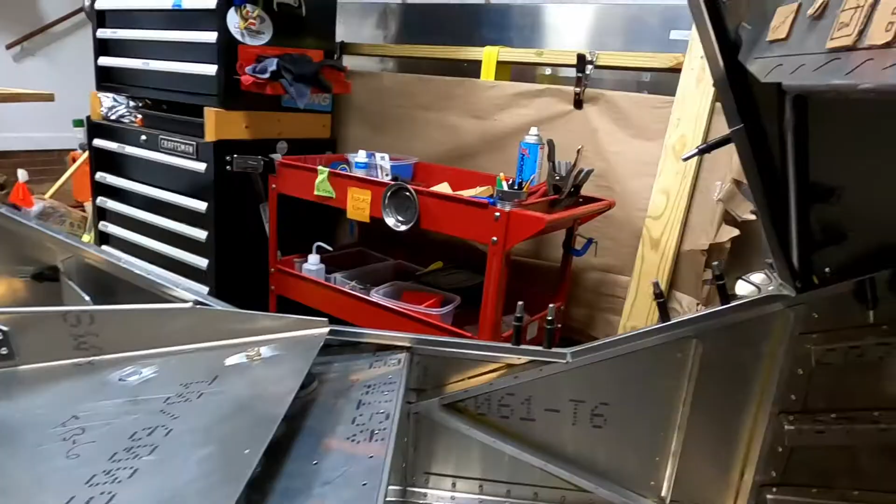Today we are taking a break from our chronological order of videos. I try to keep the videos in chronological order for my own sanity as well as yours, but in this case we're going to take a break because I want to get some information out for the sliding seats that I just installed that you see behind me. I filmed the whole thing of how to do it for the pilot side, and I already did the passenger side, so anything else you haven't seen before in another video, just pretend like it's not there. Let's get into the sliding seat install for the Zenith 750 Cruzer.

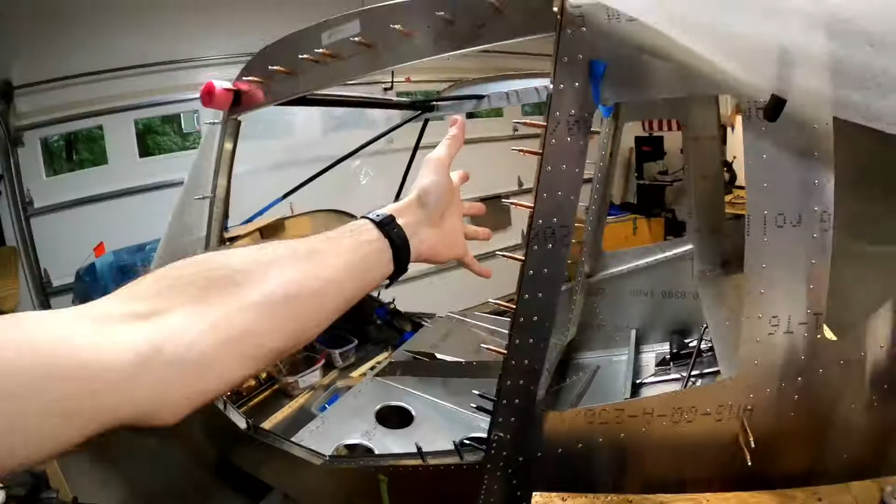I've already put this side in right here. As you can see, it's almost all the way in, but I haven't riveted yet just in case I need to take it apart to reference something. But the test fit seems to be working pretty well, and I think I did everything right. It was quite a pain, but now that I've already done this, the next one, which is the pilot seat we're just about to do, should go even faster.

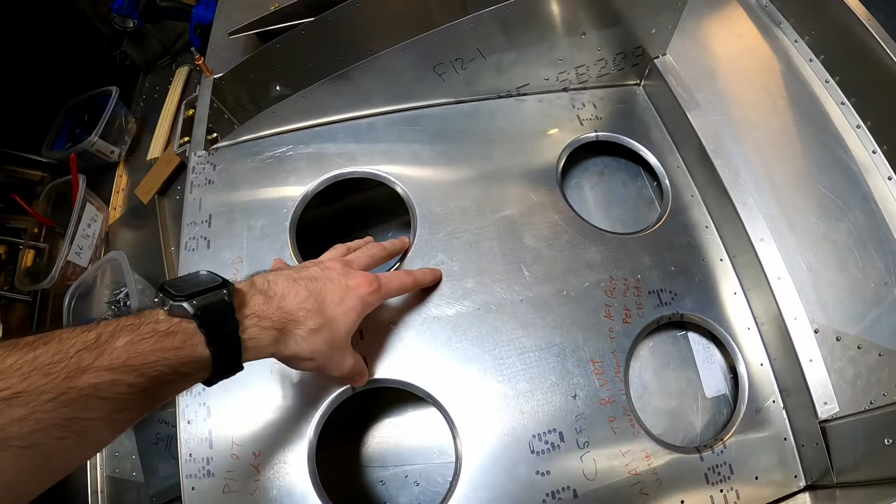So just to give you a look at that, well, it's not a very good look. Maybe I'll roll some clips in here, I don't know. But we're gonna go through building all of this anyway, so this is what it looks like. You have this handle that you can use to unlatch it and then roll it. I'm not crazy about the rollers, I think they kind of suck, it's hard to roll back and forth. That would be mostly my only gripe about it, but otherwise it works pretty well.

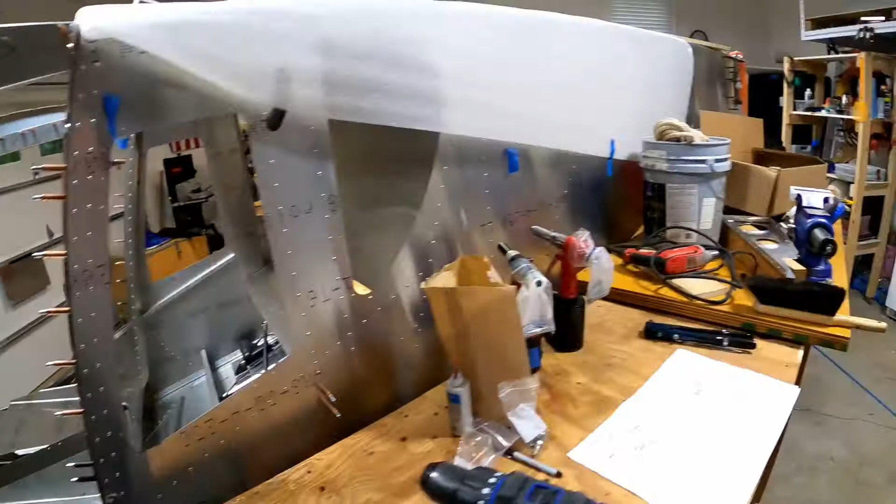So that's what we're going to do, and we're going to start doing it on this seat right here, just to give you a kind of reference before we get started. When you get this kit, it should have these plans. It has 2 pages of these drawings, kind of plans, and you'll notice one of them says STOL 750 and the other says Cruzer.

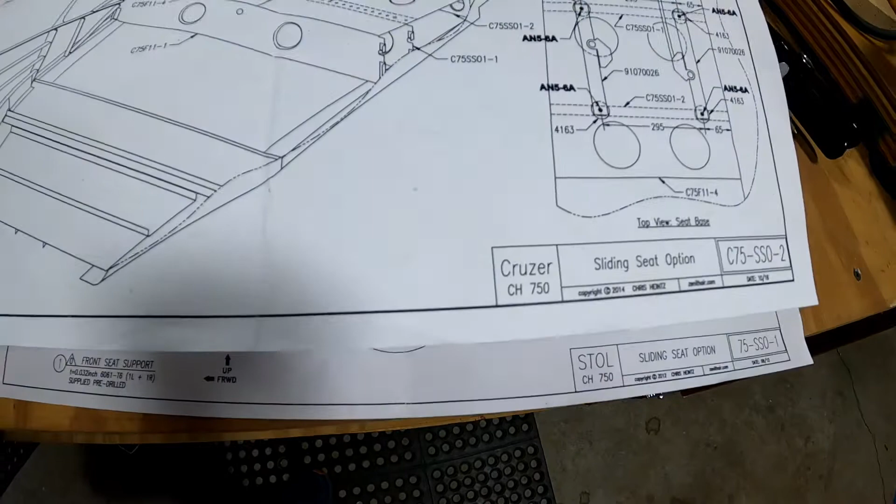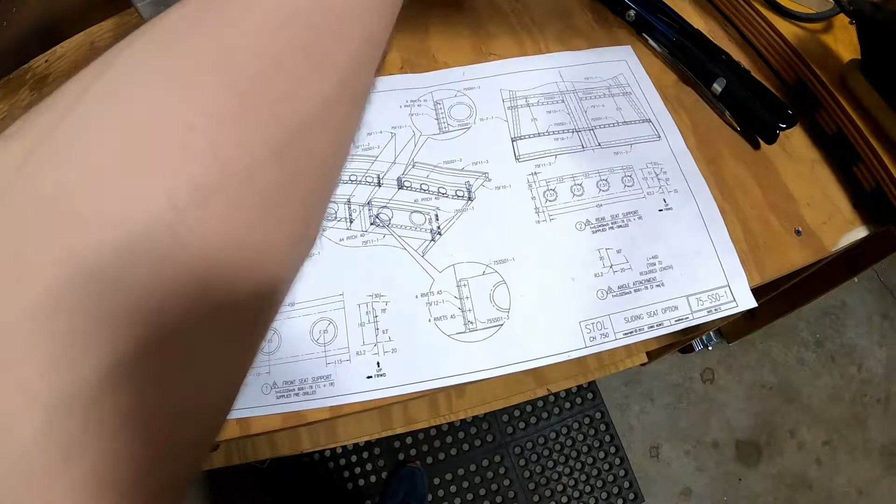At first I thought these were 2 different versions, you know, like if we have the Cruzer, I thought we didn't need the STOL version of the plans, but that appears to be incorrect, because you need all that information in order to make this work. So this is kind of your outside view drawing, showing some of the stuff, and then we have more detailed drawings and also how you would actually make these things, like the bend radius and the angle and stuff. Fortunately, we don't have to make anything, thank goodness, but we do have a kit.

Obviously half of the kit is already in there, but we have these pieces like this right here, and it's pre-drilled on one side and not on the other, but we'll get into that more as we go here. And then here's basically sort of the list of what I'm doing.

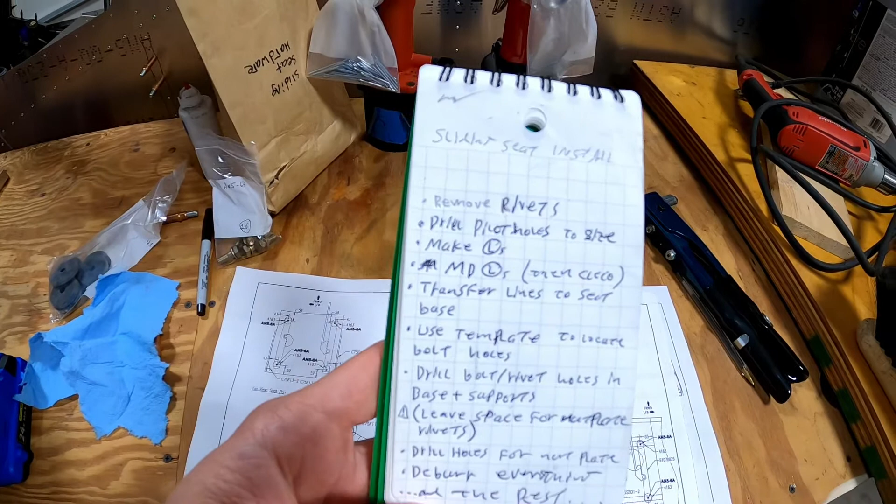First we're going to remove the rivets, because we have to take out a thing. We have to remove the old seat support. We're going to remove the rivets. We're going to drill the pilot holes to size. We're going to make L angles. We're going to match drill the L angles. We're going to transfer lines to the seat base.

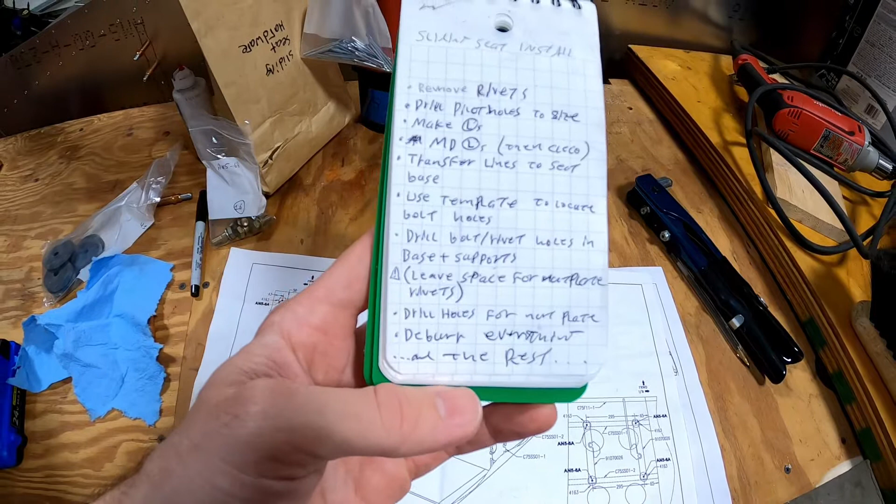I think that'll work. We're going to use a template that I made to locate the bolt holes, so we're kind of cheating, but hopefully that will make things a lot faster. And I do recommend probably just taking the time to make a template, because it will probably save you time.

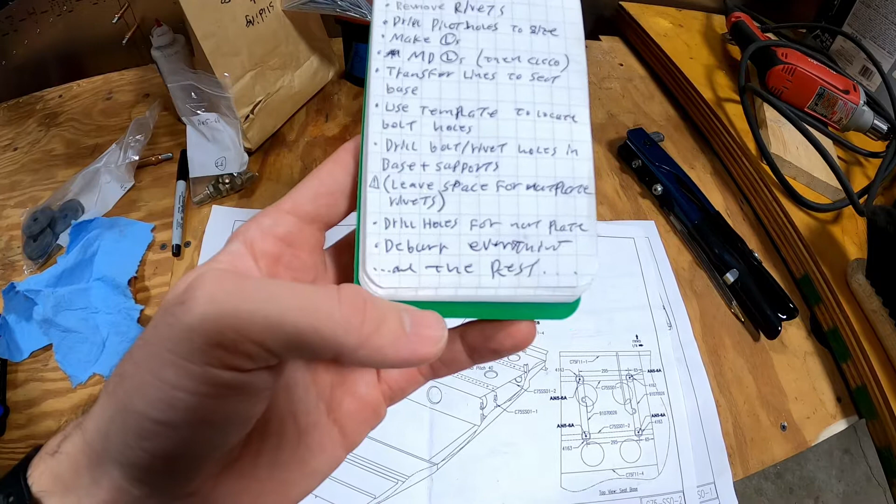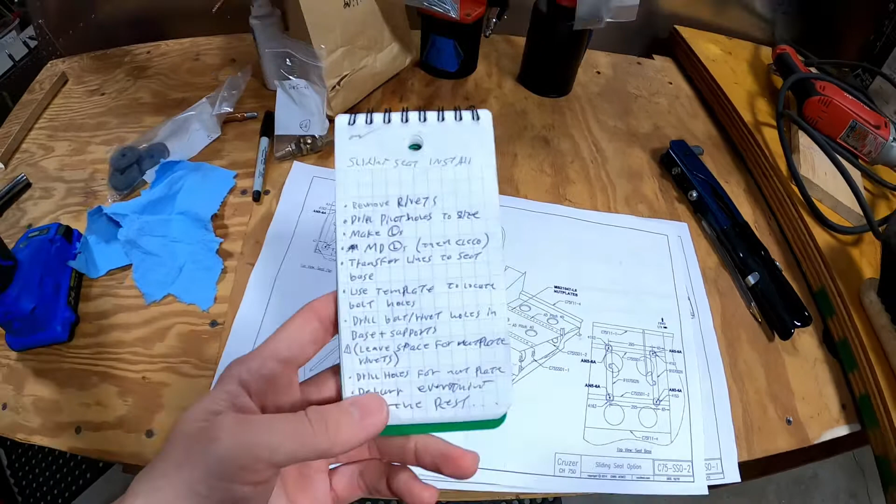Drill the bolt and rivet holes in the base, the seat base and support, basically drill through them. We need to leave space for the nut plates for the bolts, and we need to drill holes for the nut plates, rivet holes for the nut plates. And we need to deburr everything and a bunch of other stuff that I ran out of space for on this piece of paper. So it'll become clear once we're actually getting started on it, because it'll kind of just be obvious what the next thing is, or at least hopefully it'll be obvious.

Maybe that won't go like that at all, because maybe this will actually turn out to be still more difficult than I thought. I don't know.

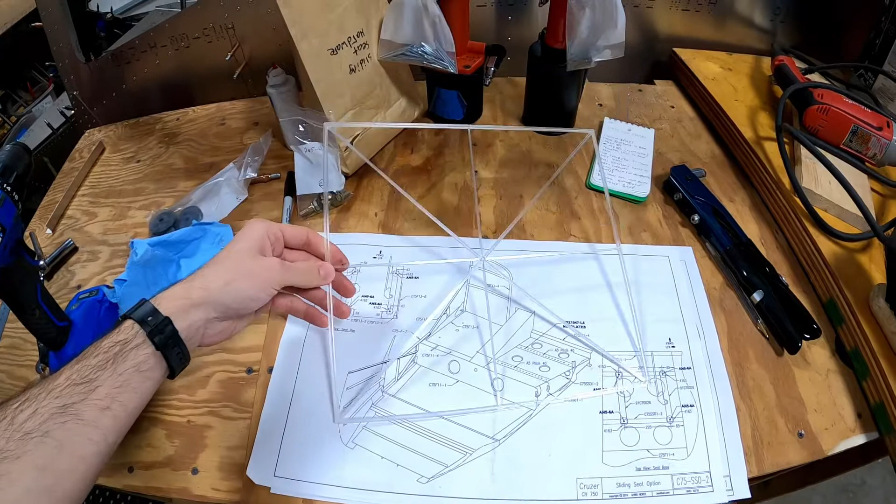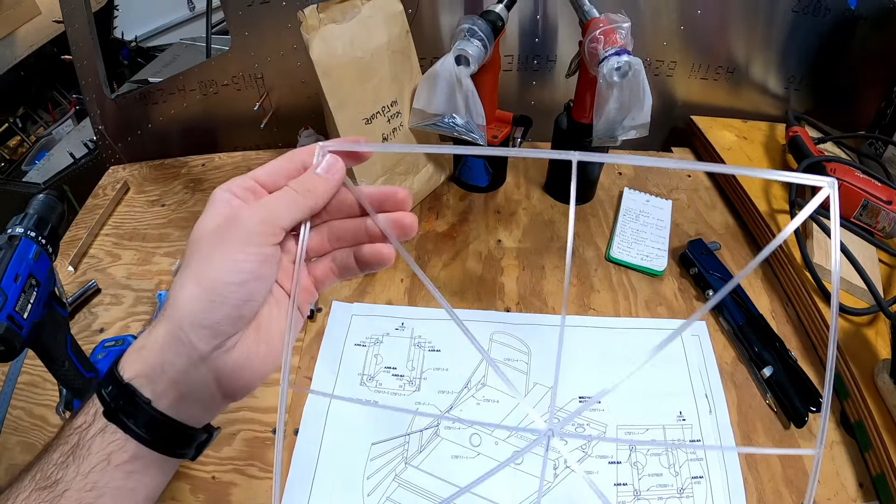Just for reference, this is a template I 3D printed on my CR10, which has a 300mm by 300mm print area, and this thing maxed it out at 295mm across and 280mm top to bottom. It's clear so it's kind of hard to see, but I haven't used this yet so we'll see if it works. The idea is at the very corners there's a little notch, and that should be where all the holes need to go for our seat tracks, which we're going to take a look at in a moment.

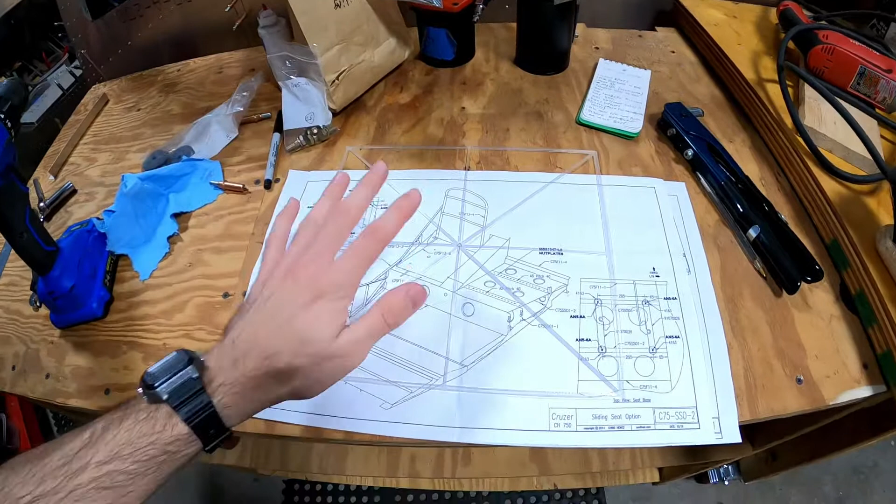So let's just get... ooh, that kind of came apart there. Well, that's okay, it still works good enough. Let's just get started on this, and we're going to start by drilling out the old rivets.

So the first thing we need to do is take out this seat pan, or no, seat base. This is the seat base right here. This is the seat pan, the thing the actual seat is made out of. Just so we're getting our terminology right here.

The first thing we need to do is remove this old seat support. So we're going to drill out the rivets right here, and then drill out the rivets on the front, right there, and then on the bottom as well.

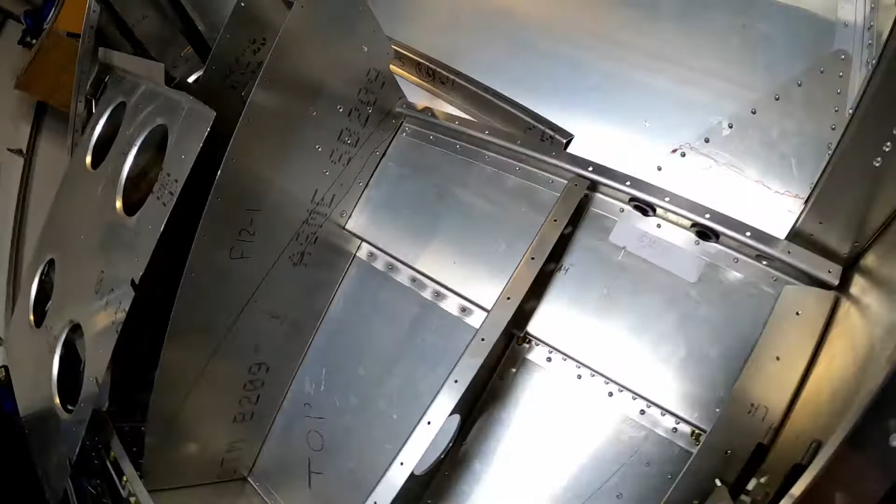We're not going to drill out these ones on this L angle, because the rivet heads are blocked by the landing gear, and I don't want to take off the landing gear just to get to those rivets. So we're just going to leave this L angle here in place. It's not going to hurt a thing, it'll just be sitting there until we want to remove it for some reason.

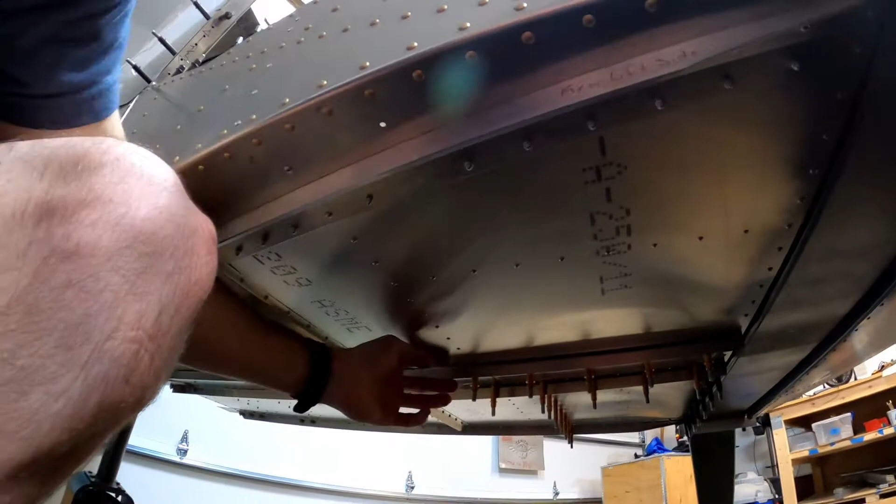We're going to remove the rivets along the lip, or flange, of the gear channel right here, so we're removing the rivets that are under this seat section. What I'll do is come under here and actually label them with a Sharpie to make sure I'm drilling out the right rivets.

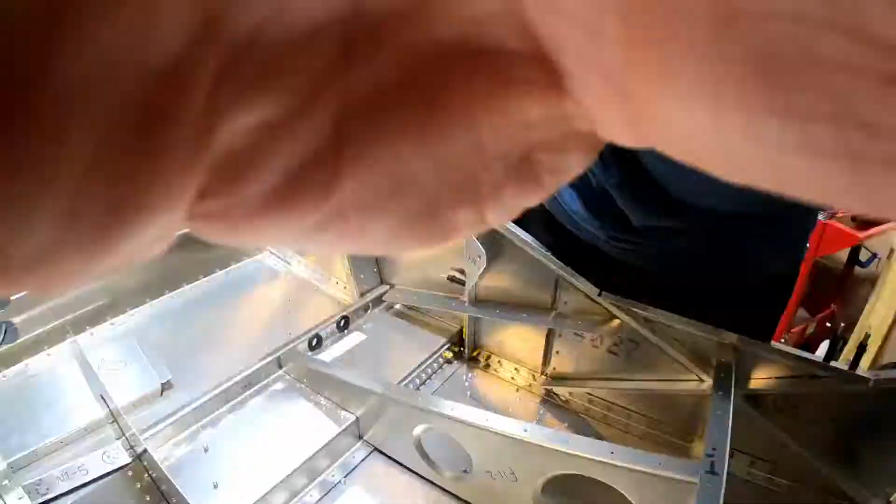Okay, so now we have pulled this seat support out, which is great. Now we need to start working with the new seat supports. And a couple things about this one: we're actually going to have to already deviate from the plan.

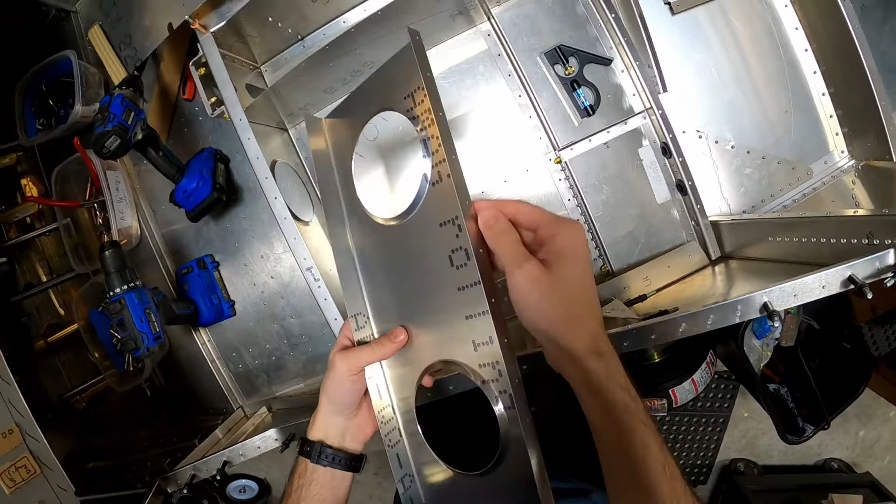We're not going to drill all these pilot holes out to size yet, because I forgot that on this forward seat support, this taller one, there are no holes. So we have to drill the holes out so that this will fit in here.

Now, speaking of fitting this in here, interestingly enough, there is one hole. Let's see, can you see that? I hope you can see that.

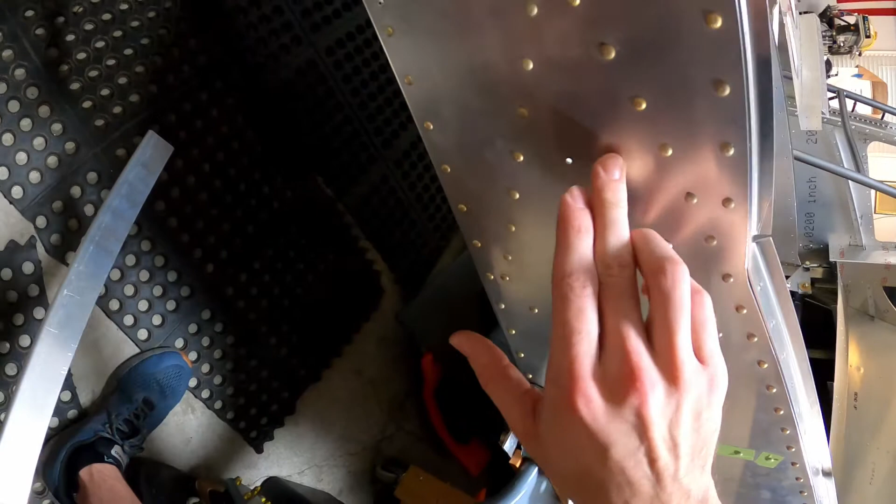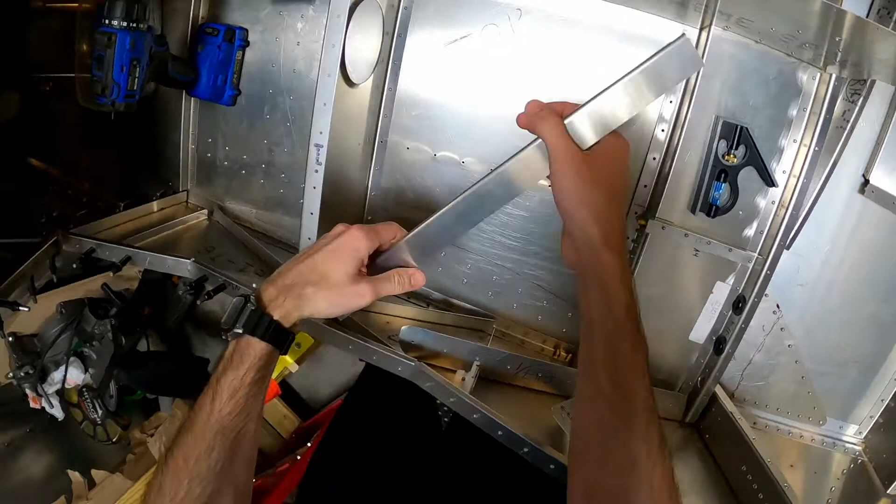There is one hole that was already drilled in this cabin side assembly, because the cabin side assembly was made at the Zenith factory, and so they put that together, and it comes all put together. But there are holes on the side, these open holes right there and there. So there's two of them on the side, and then there's one down there. That is actually pretty great, because that gives us a good locating hole, but it's only one locating hole, and it'll be right on the very edge, this edge hole right here.

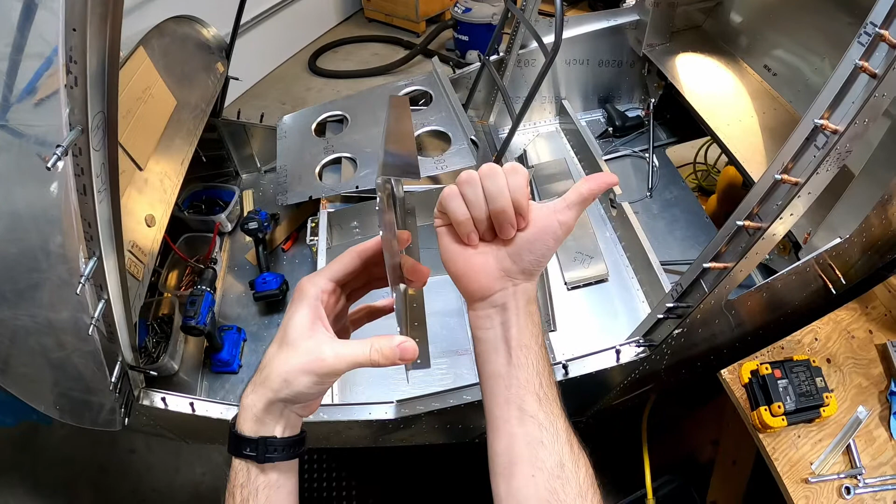By the way, if you're trying to tell the difference between the two sides, because you'll get sort of mirror copies of the seat supports for both seats, the way to tell is you want the flanges in the lightning holes to point backwards, pressed in and aft, and the top is going to be the side that has a fatter flange, and there will not be any holes on the top.

And then on the door side, the outboard side, you're going to have cutouts right here for the extrusions and whatnot. So in here, and these can be a little tricky to get in sometimes, but you want to get them like this. Yeah, so you can see there's cutouts there for the extrusions in the side of the cabin.

And pretty much the same deal for the aft seat support. It has this little lip, kind of this little extension here on the edge, which I think there's actually too many holes to even be able to reach and rivet. So we probably won't be using all of these, but it has those holes right there pre-drilled to come in here. And actually we'll probably have to trim this a little bit. I had to trim it on the other side, so we may have to trim this edge to fit in here, but it basically fits right along.

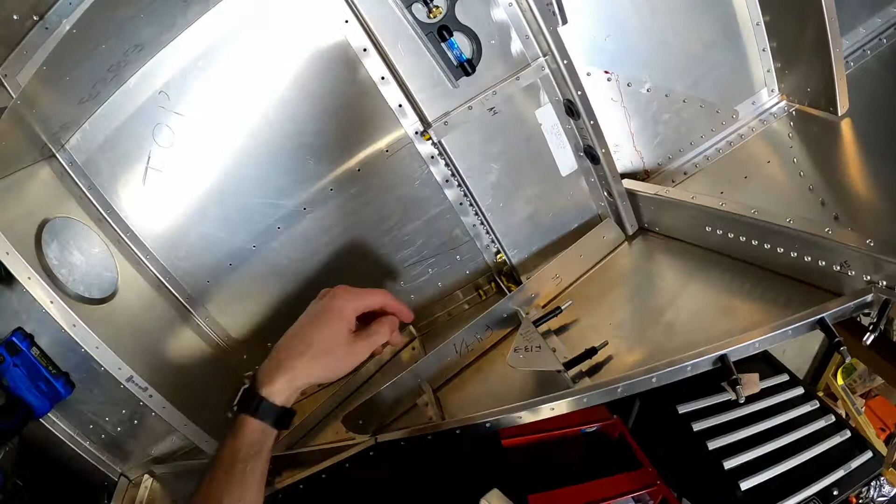Yeah, it's supposed to fit along the extrusion. I'm not sure, I can't remember if I just drilled the hole like this or if it was pre-drilled, but this hole for the bolt is just too close to the extrusion to allow this to slip in between it. So we'll have to trim this up.

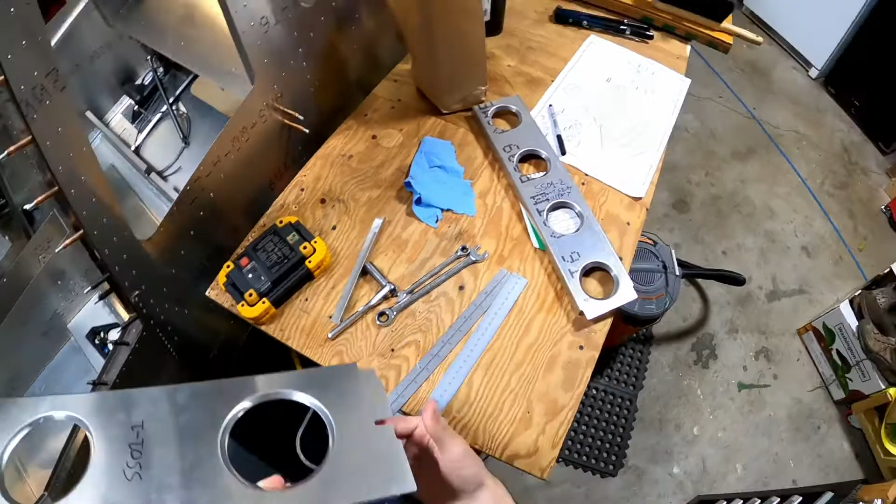But anyway, first let's deal with the forward seat support here. So what I'm going to do is actually drill this out to A4 size. So we'll go to A4 because that is the size of the hole that is already in the cabin.

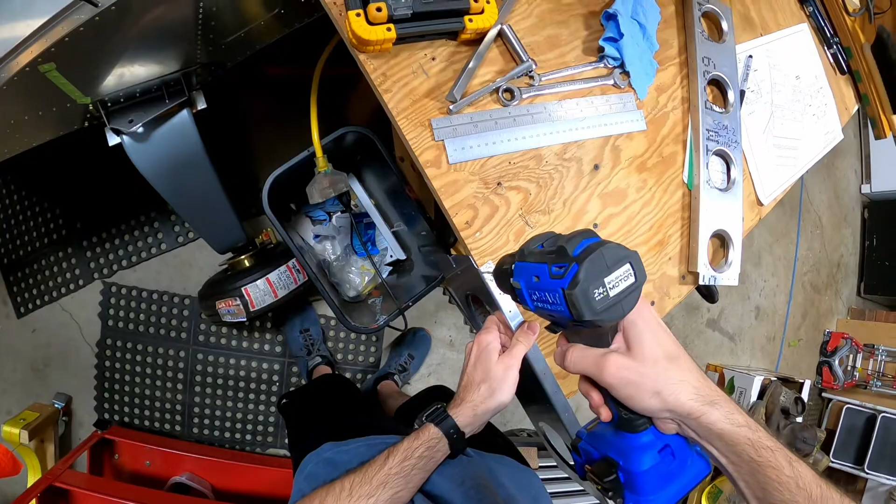We'll try and do it like this. So let's see, so cabin side. So we'll drill this to A4. And then we'll get our clecos and cleco this baby.

Okay, gotta put it kind of an angle there. There we go. All right, let's cleco this thing. And of course, in case I didn't say it already, there are many ways you can do this, different orders of things, but I'll just show you the way that I'm doing it here.

All right, so we're clecoed up on that one side, so we just want to straighten this up. Now, we can't just have it run to this hole, by the way, this hole that was already in here that was drilled for the old support, because it will not be straight. It won't be perpendicular to the rest of the seat area. So probably the easiest thing to do is just sort of square it up along here. It doesn't have to be perfect because we do have a decent amount of flange here, but we want it to be pretty close, obviously.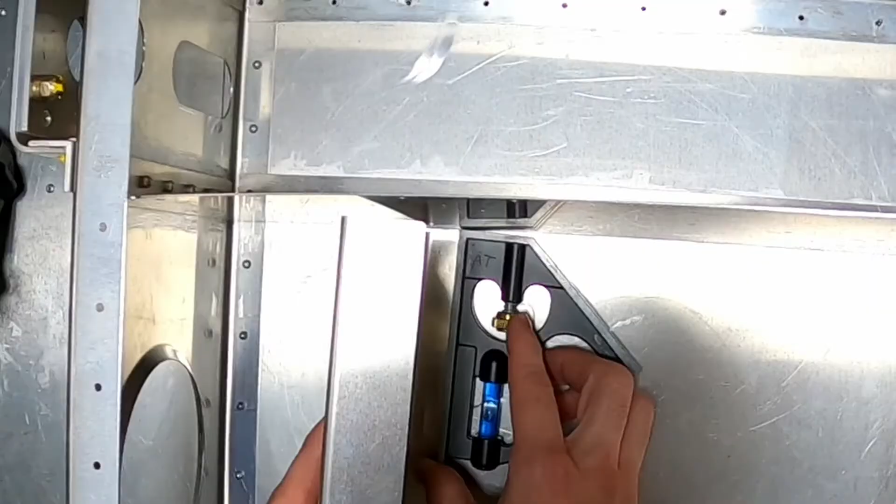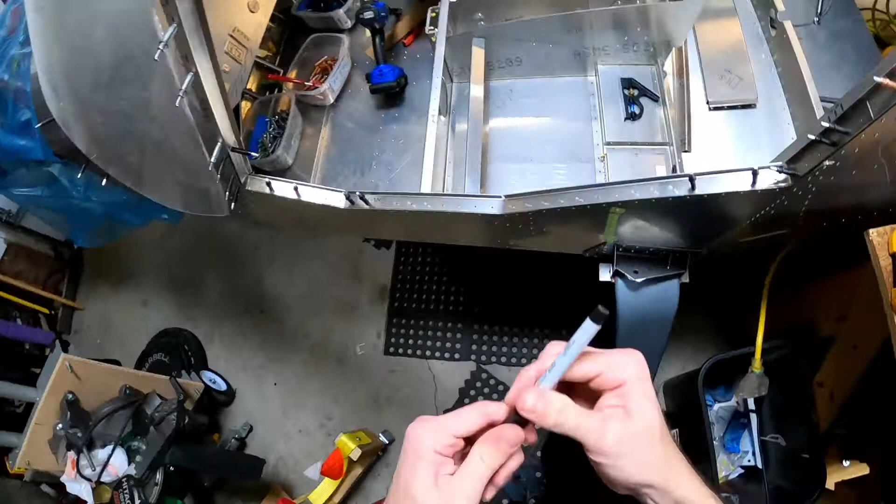So if we kind of bring it up here and figure out where it is squaring up, right there, that looks good right there. And then we can get our other Sharpie and we can just make a mark. We could just make one or two marks just to get an idea. Again, we're not going for spaceship precision. Yeah, and the other thing we could do, we could just make it easy. We could put a line along this flange. That might be nice for later. I can't really get a Sharpie down on the other side, so we'll do that.

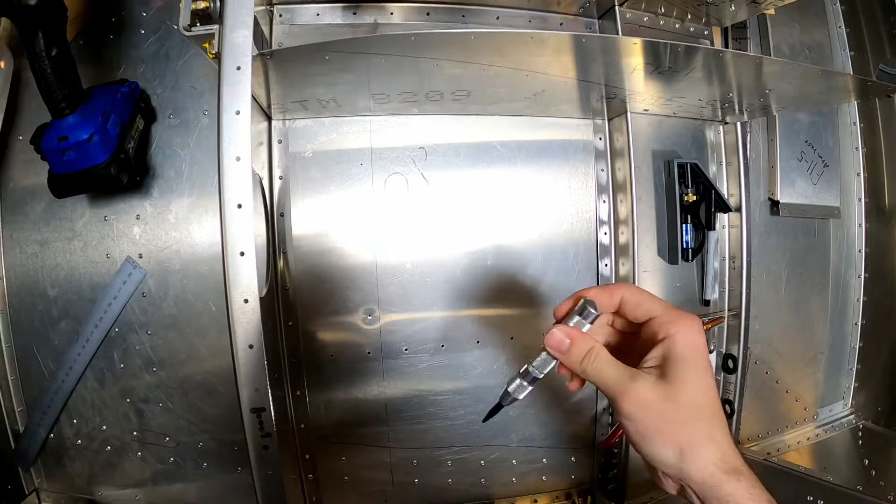Okay, first I'm going to drill a couple locating holes so that way I can actually match this stuff up. So I've got a block of wood underneath here to support the skin, and we're going to do a center punch to make it easier. Oh, that's a little too powerful. A little too powerful. Okay. I don't want to actually dent metal, or you know what I mean. There we go. Boom. Okay. Cool, so that's super groovy.

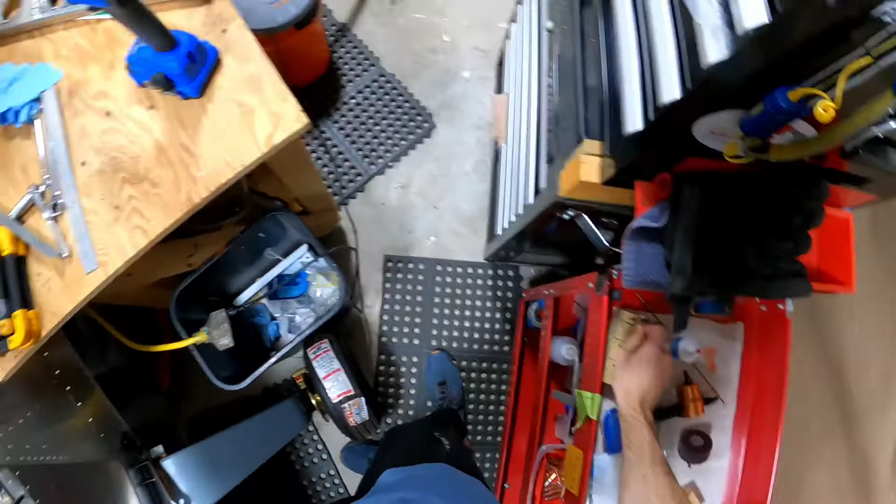Let's get our A3 sized bit. Get our A4 over here. I like to keep my bits nice and organized. Keeps me from reusing old bits and that sort of thing. Okay. And let's get this guy here. And we'll go ahead and drill a few holes.

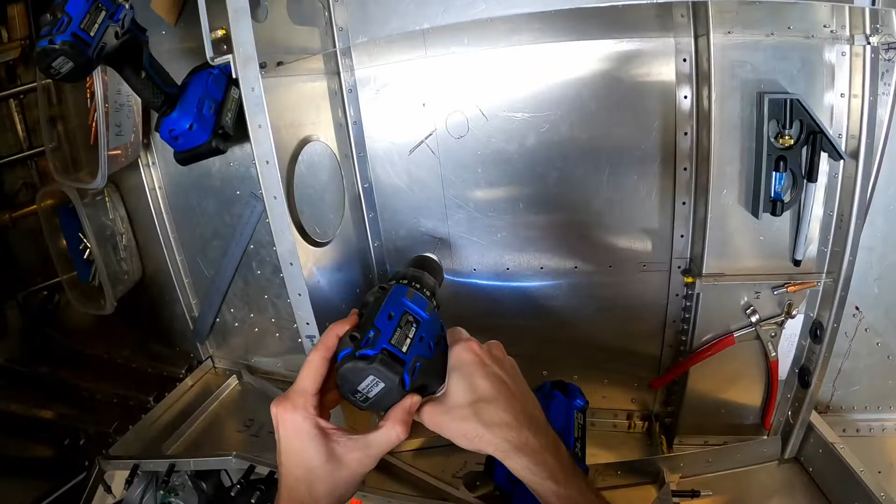I think this bit is just about done, actually. Oh yeah, that's a pretty crappy bit. Alright, you go in the trash can. We're gonna get a new bit because I don't have time for dull bits, I don't have time for unsharp bits.

Okay, now that I have those holes drilled, we can put this back in place, cleco this baby, and then drill the rest of the pilot holes, and then drill them up to size. A4 is what we will do.

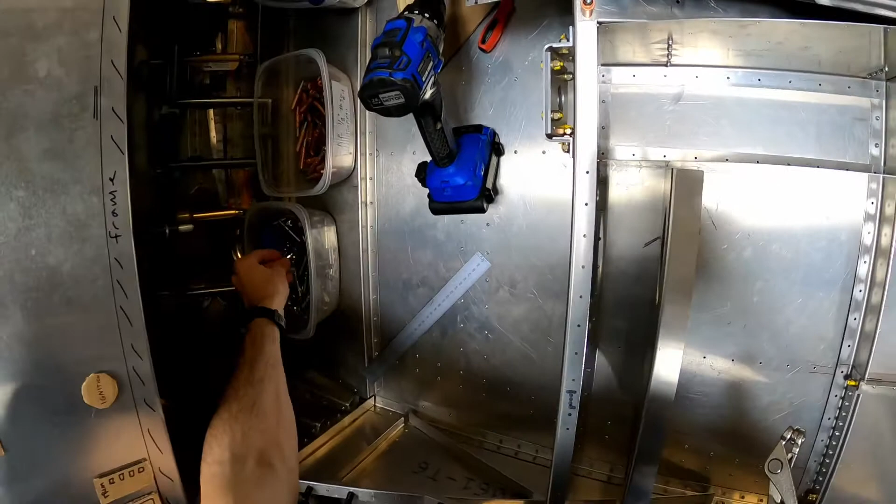So first we need an A4 cleco right here, or number 30, and we'll get our number 40 sized clecos. Cleco in there, like that. I think this will work out pretty good.

This was very confusing, much more confusing the first time. Now I think this looks pretty darn good. And of course there is some wiggle, some bendability to the parts. Now we need our number 30 bit here, our long number 30.

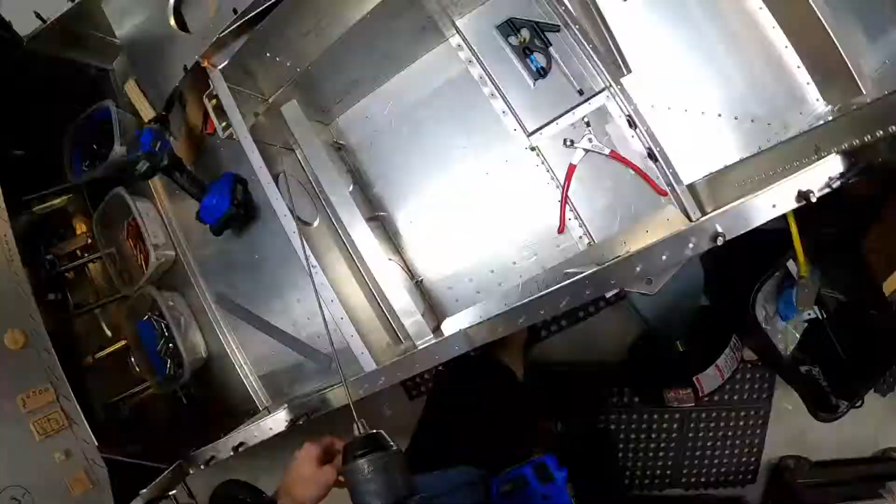Put a little bit of Boelube on there to start out, and we will just match drill all of these holes. And so we can go ahead and drill those out to A4, or yes, A4.

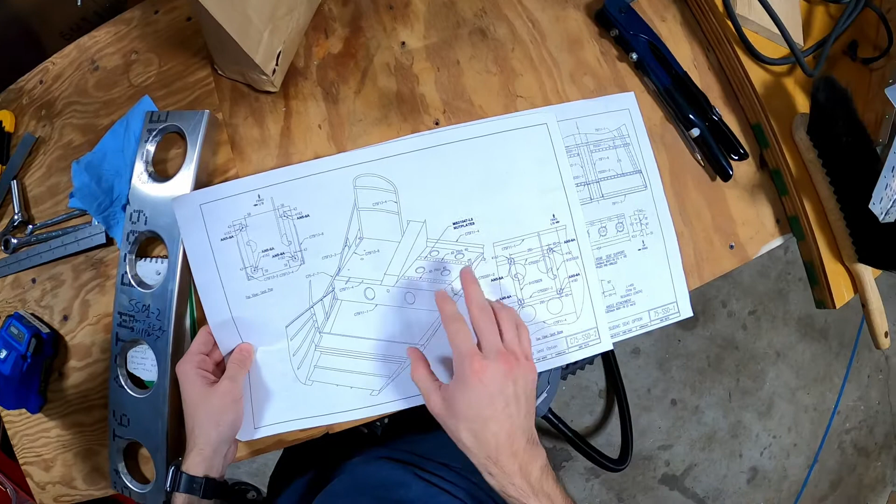Also, just referencing our plans here, the top holes for the seat supports, the seat support into the seat base is going to be A5, but in fact almost everything is A5 except for the holes we're drilling right now. So the forward seat support on the bottom skin, those are going to be A4 pitch, pardon me, A4 pitch 40, and this will be slightly easier to do from the bottom.

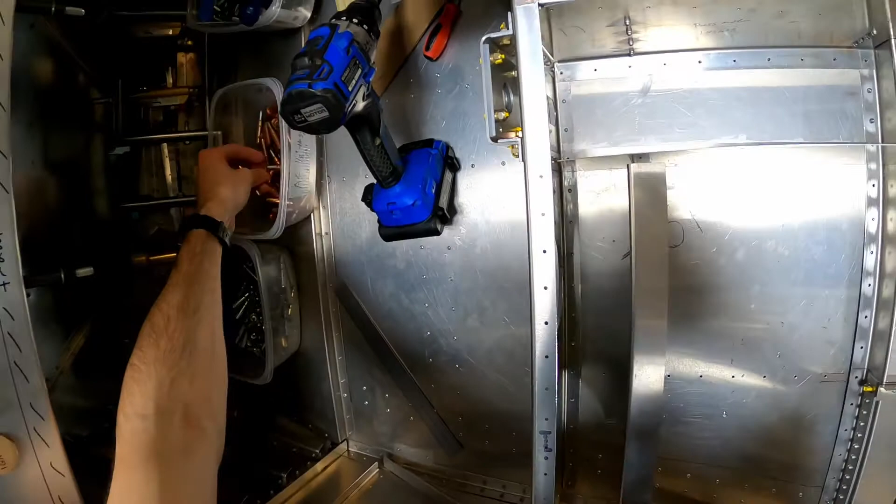All right, now we'll put a couple A4 clecos in here. Put a goodly number of them. What's up with that one? I don't know what the deal is with that hole. Strange. Okay, there we go.

And put it over here, and like that, and like that. Oops, wait. Oh, snap, okay, I made a boo-boo. How did I make a boo-boo? Oh, okay, I drilled through the hole that was already there.

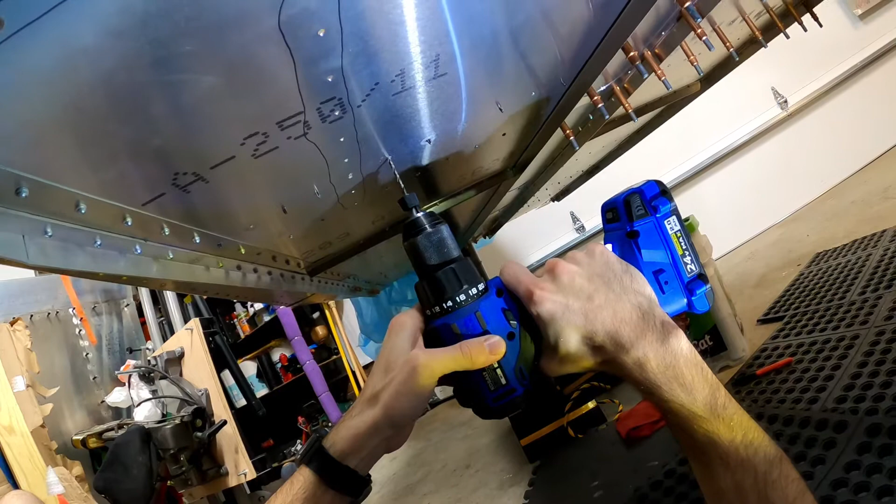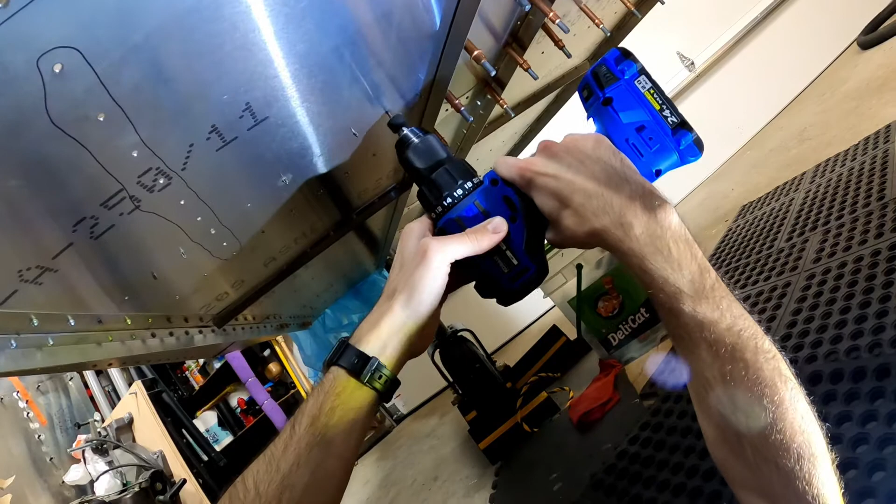Alright, let's drill out the rest of these. Alright, yay. Now that we have the front seat support drilled out and clecoed in place, now let's drill these holes out to the proper size.

Because these holes back here are already A5, these need to be A5 as well. Zenith was nice and put pilot holes in, but we still need to drill these out to A5. And then we will be able to cleco them in place and do other things.

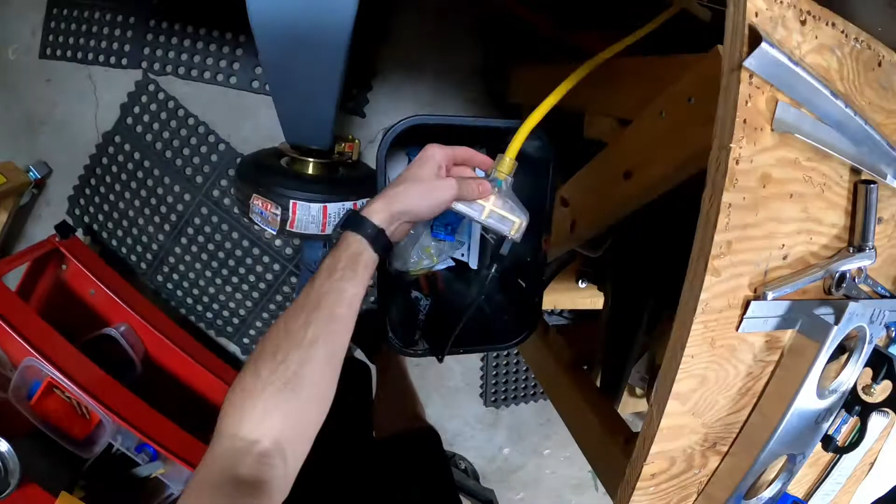So here we go. You know what? Let me get this thing out of here somewhere. We'll just put it over there.

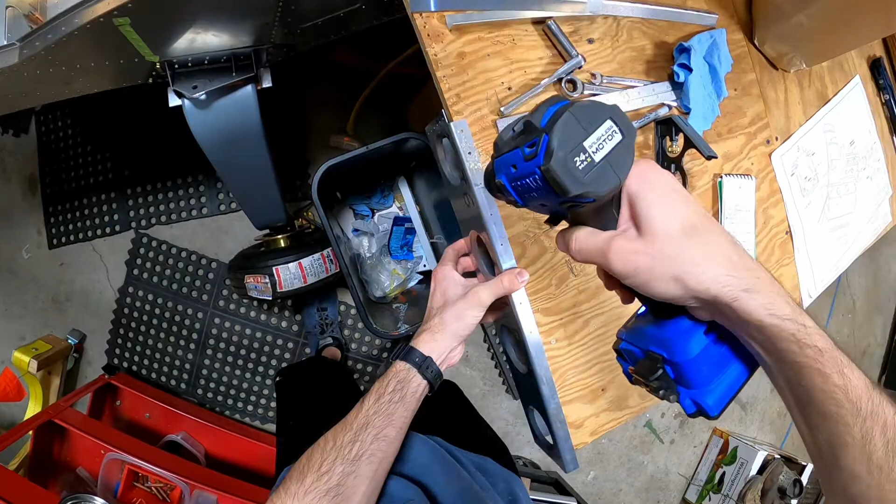Okay, looks pretty good. All right, same thing with the aft seat support. The big flat side, the larger flat angle, is going to go on the top. The flanges point aft.

Oh yeah, that's right, we got to trim this baby too. Okay, let's do a little trim. Let me get some, I like these guys.

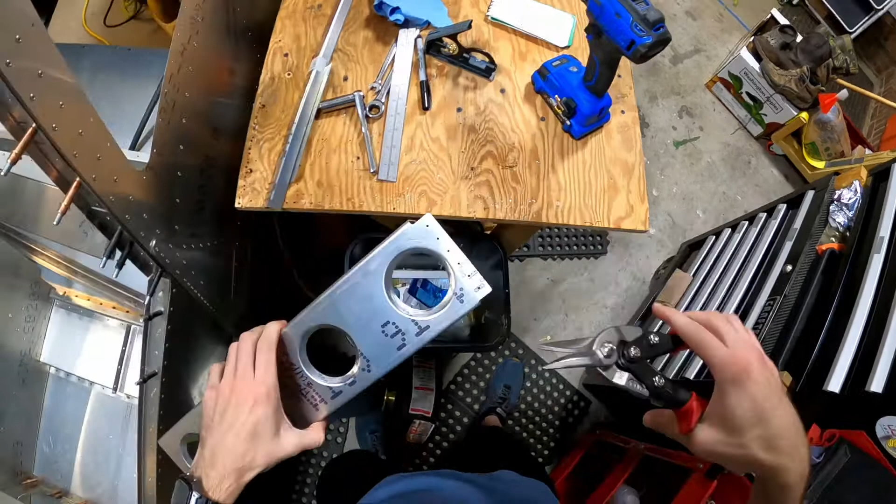Somehow, cuts to the left always work better than cuts to the right, but that could just be because I'm right-handed. Oh yeah, well, we'll go from this angle.

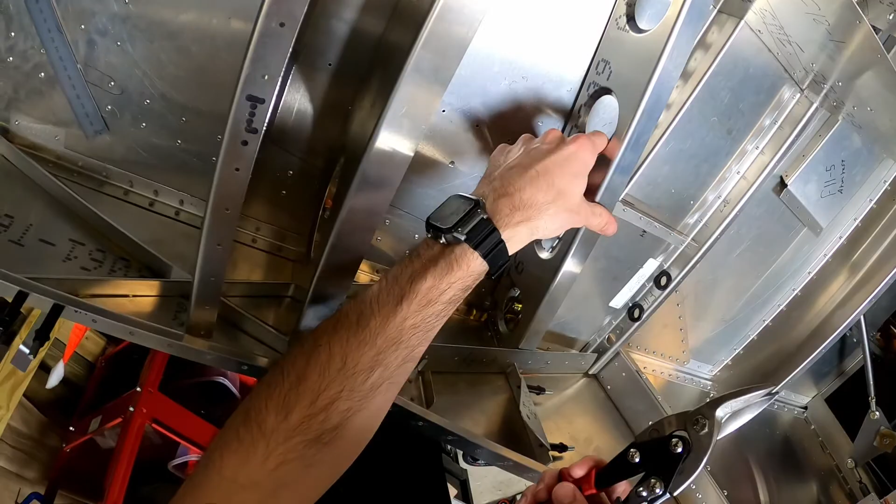So I'm pretty sure, actually, let me just get an idea. Let's put this guy in place. And it's like, I can't even, yeah, that bottom hole, we're not even gonna be able to get to that, so we can just pretty much forget about that one.

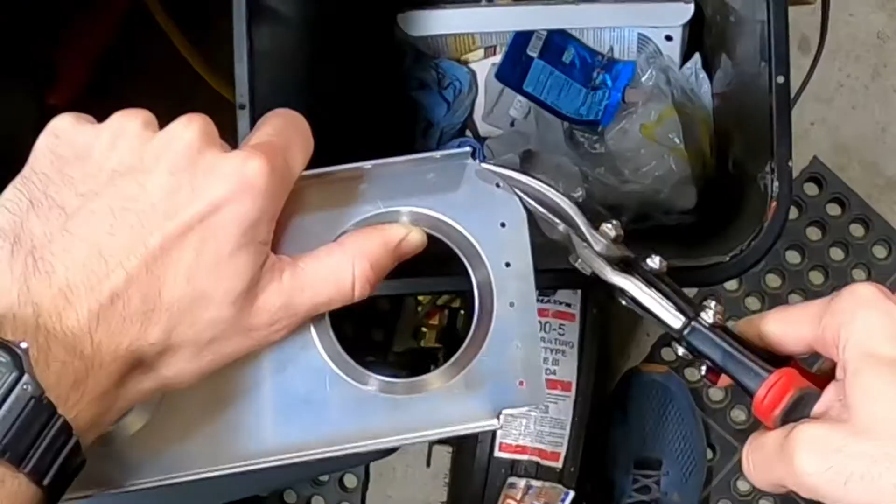Let's go something like this, a nice swooping curve, might even curve. Let's just try it, see how that works.

Alright, I think you can see what I'm talking about, but in case you can't, it will be very obvious when you're doing this yourself.

Okay, I'm hitting something else now. Oh, duh, okay, whoops, didn't see that. We gotta punch those guys out. Somehow I missed those.

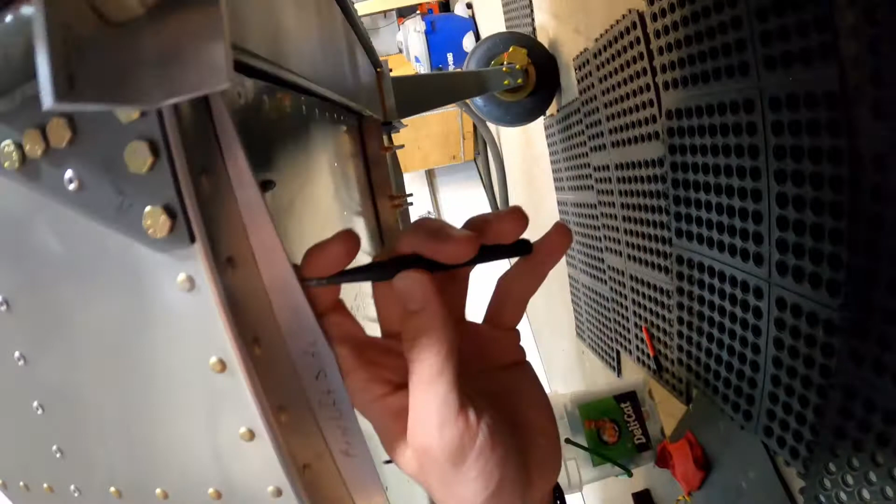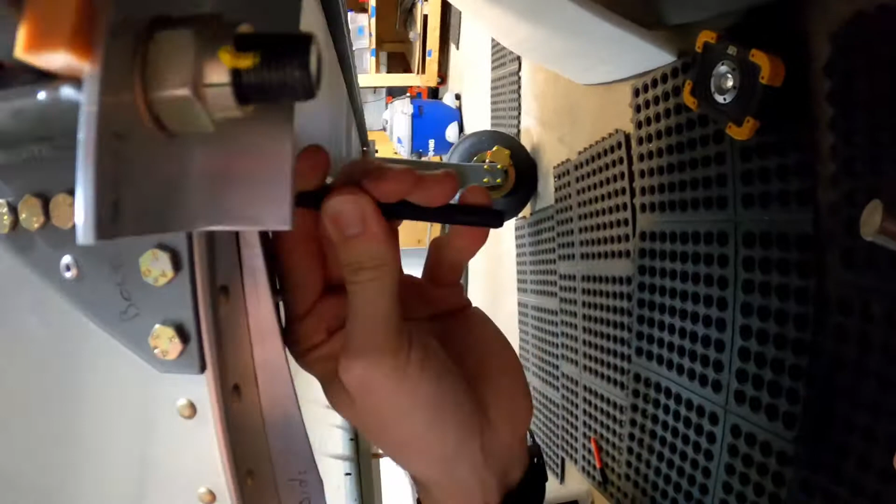So these guys right here. There's a bunch of layers going through there, so it's extra difficult to get them out. That would explain a lot, though. That makes a lot of sense.

There we go. Okay. Oh, daggum, all right, let's keep going. There we go. All right, that was a tricky little guy right there.

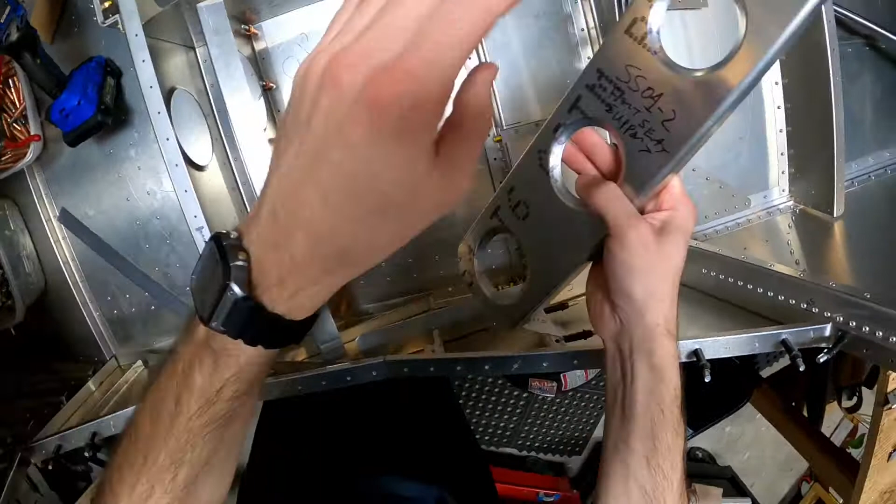Okay, let's see how this fits now. So we want to slide it in with the flange first and then rock it into place. Or not, we don't want to go under that flange, we want to go on top of it.

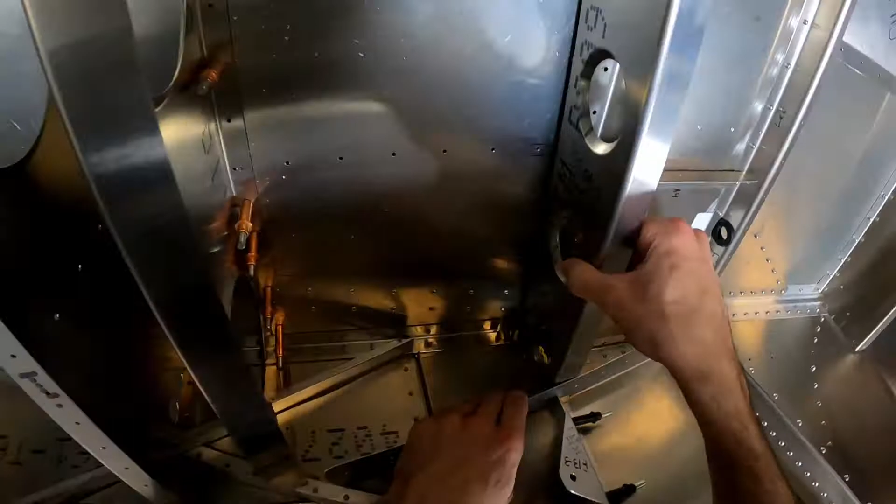And we have to try and get up to the edge. A little tricky to get in place, but it seems to work pretty well. We're clearing that nut, so that works pretty good. It's just kind of extra tight. There we go, so we'll get this in place.

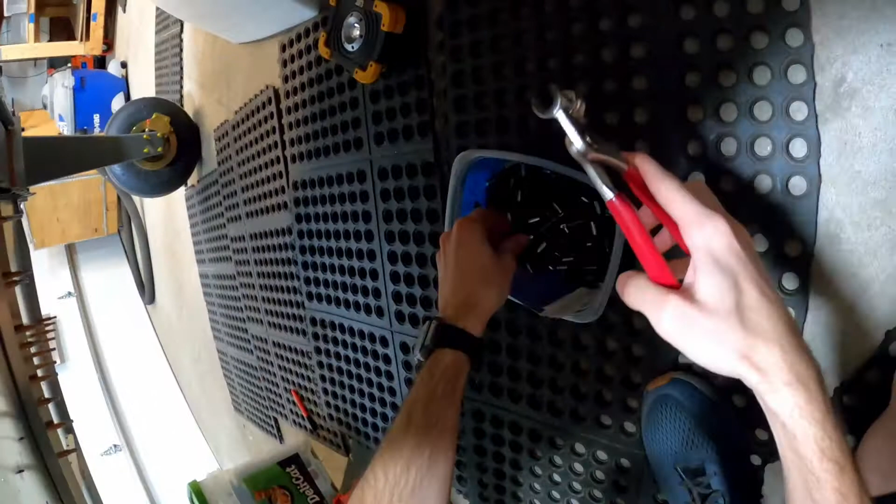Unfortunately, this one we have to cleco from the bottom, which is just a bit more of a pain. But we won't put too many clecos in here, we'll just put enough to hold things in place so that we can get some measurements and stuff.

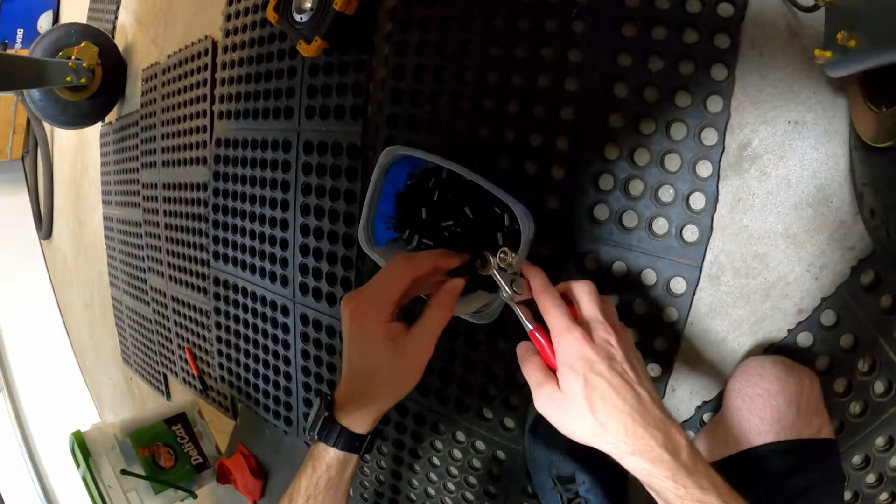Really got to push that hard. It might be because of that flange thing. Alright, yeah, that's a little wobbly.

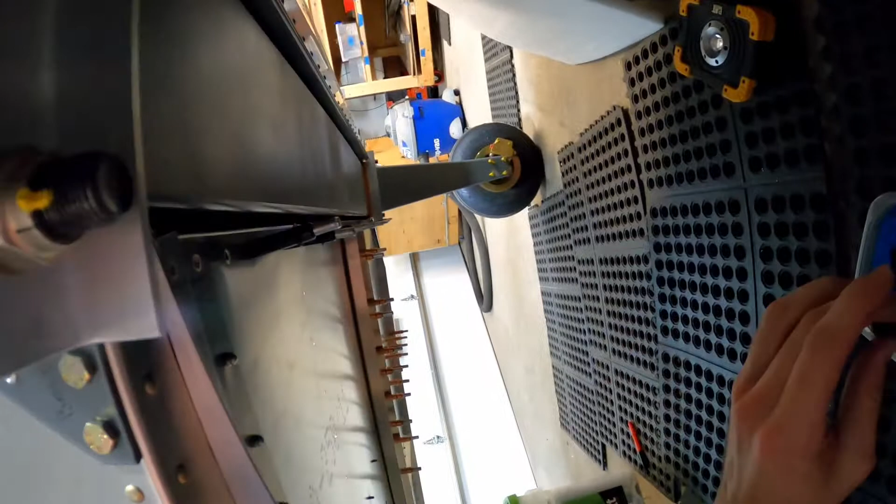Oh yeah, that's way off there. That is way off. All right, we're gonna have to do something with that, cause that's like... yeah, that's way, way off. What am I hitting? Oh, son of a gun, I'm hitting that rivet.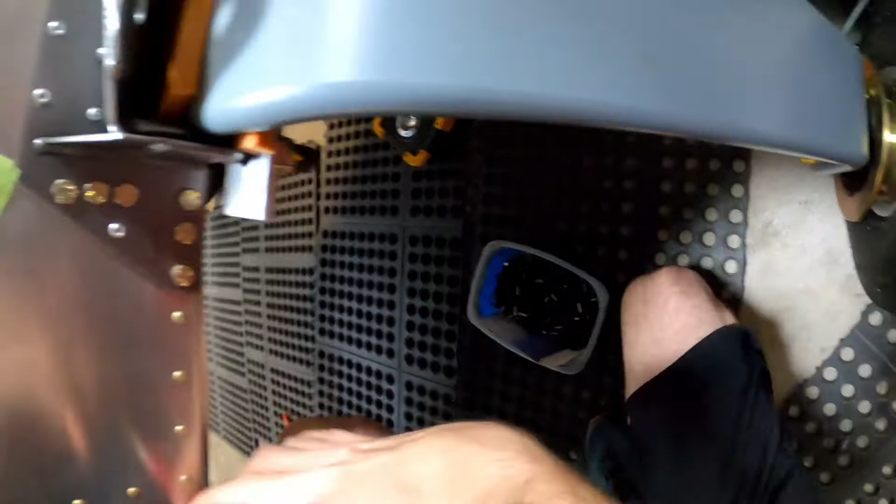Okay, all right. No, I remember why. So I remember now that with this aft seat support, not only do we have to cut the corner off here so it will clear the bolt or the nut, but we also need to actually reduce this flange right here, because it's actually hitting this extrusion.

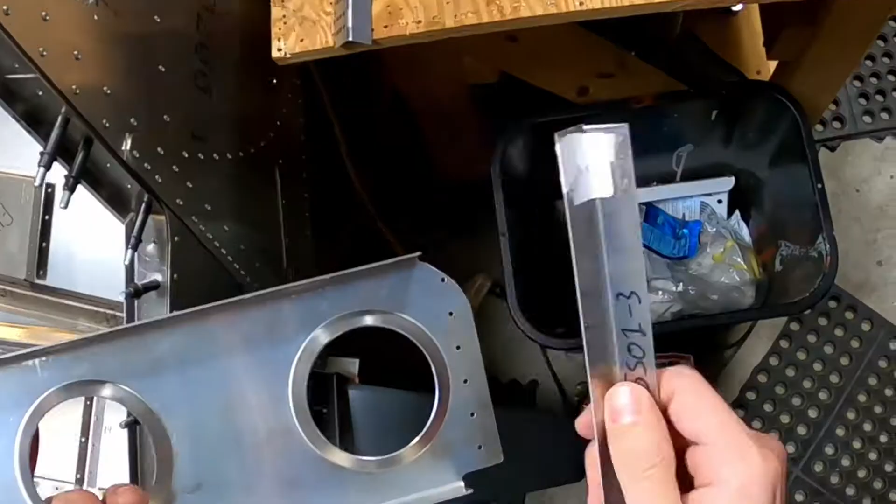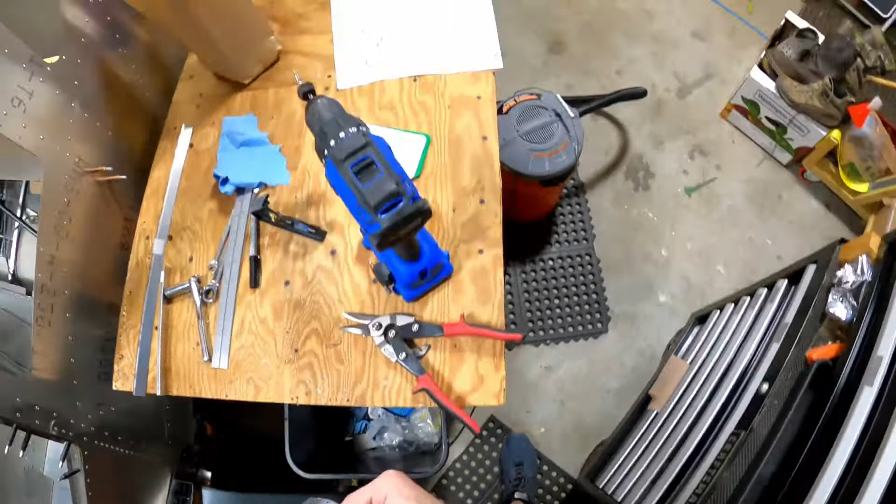If you can see that, it's the extrusion that this flange is resting against. It's kind of like, it should be sort of just on the edge, but it's hitting up against the side of it, and it's not letting it sit flat. So we're going to have to use some very technical processes. First one we're going to try is the old...

Squisher. All right, so we can sort of squish this. That might help. Just a little, nothing crazy.

It's working pretty well already, actually. There we go, so you see how it's kind of reduced right there? I think that will help a lot. Let's make sure it's not going to be a problem though.

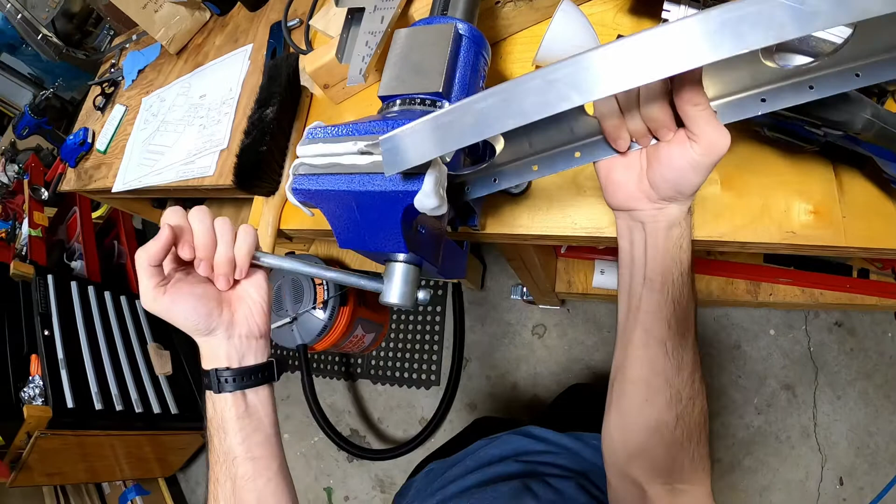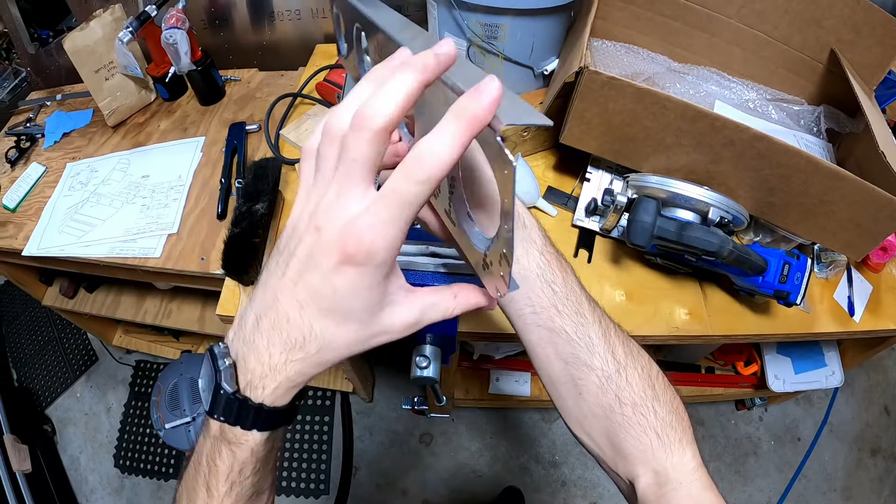Whoop, it's bending it a little too much there. Bent it a bit much, but you know, that's actually kind of good. That's a little too much. We're gonna flatten that out, but it's kind of good.

In the sense that we need those holes to actually fit a little bit better. I mean, we need that flange to be a little bit farther back, because the holes in the bottom skin need to line up better.

So that looks a little, maybe still a little bit too squished, a little too warped. Let's try this. It's nice and easy, nice and easy. That looks pretty flat.

All right, let's see how she fits. In there, over that. Let's see, is there something else that's keeping it? So over here it fits great on that end.

On this side, honestly, not so great. And that's a problem, we can't have it fit not so great. It has to fit at least good enough. Alright, so let's do this.

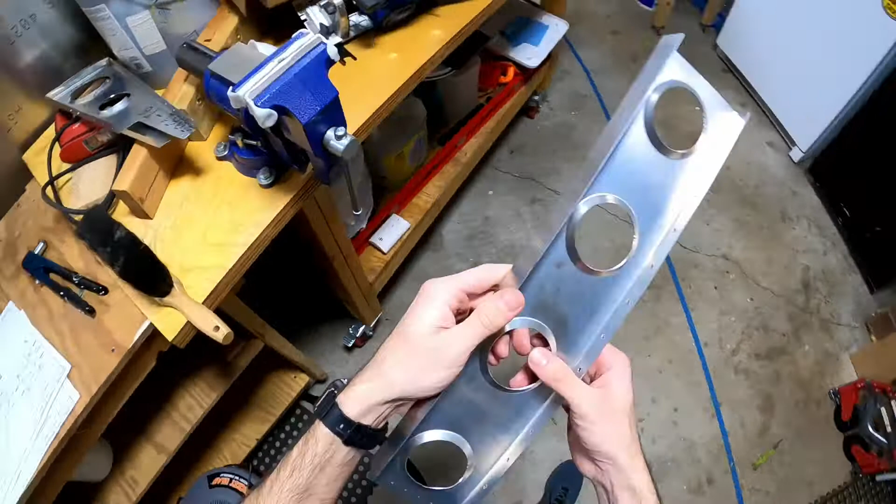We're going to do some precision bending now. So now what we're going to do is stick this corner in here. I mean, I could just totally get rid of the corner, but I don't really want to. We're going to bend this a little bit.

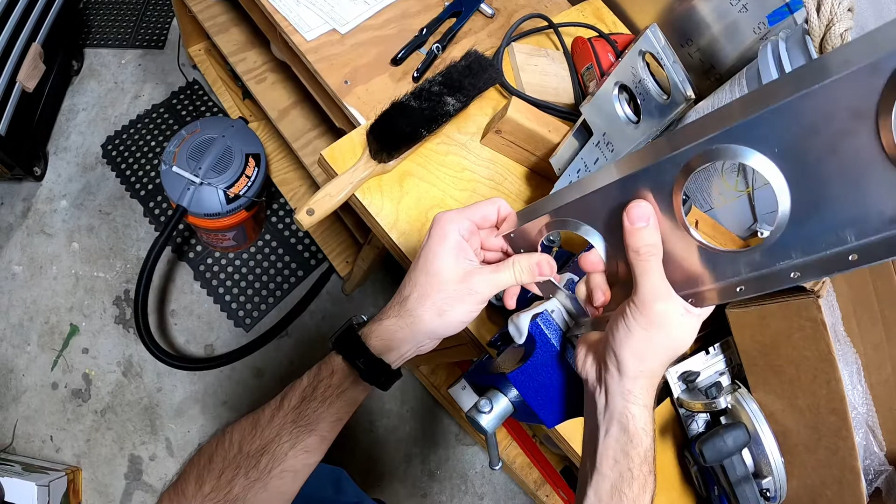Just a little bit, bend it back a little bit, just to give us a little bit of space here. Those holes have got to match up.

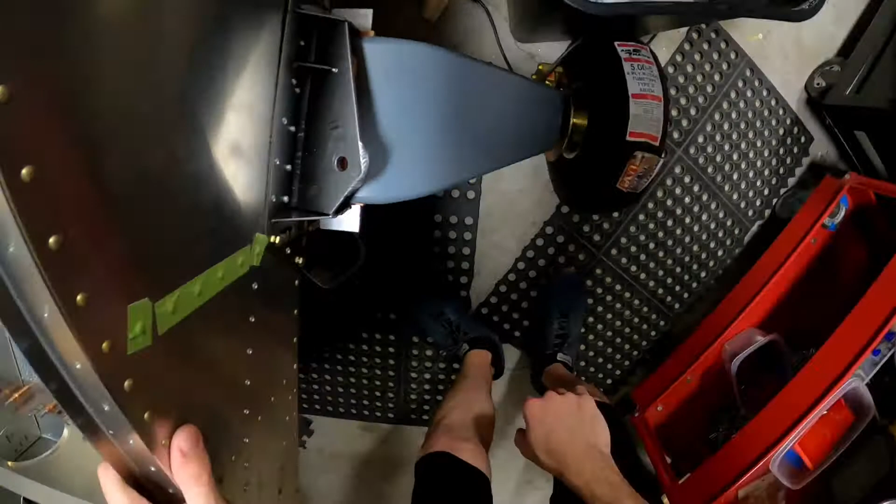If we can get most of these to line up, like almost all of them, then we can match drill and get the rest to work well. So let's put these guys in here.

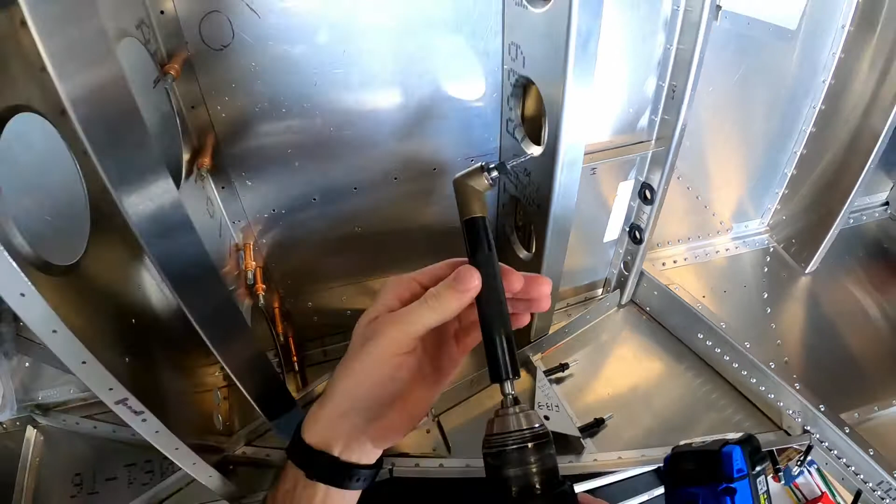Okay, now it's time to match drill this aft seat support to this extrusion right here. Don't know if you can really see what I'm doing exactly, but you'll get the idea. And I'm using this nice 90-degree attachment. This is a, interestingly enough, Avery tool attachment, 90-degree thing.

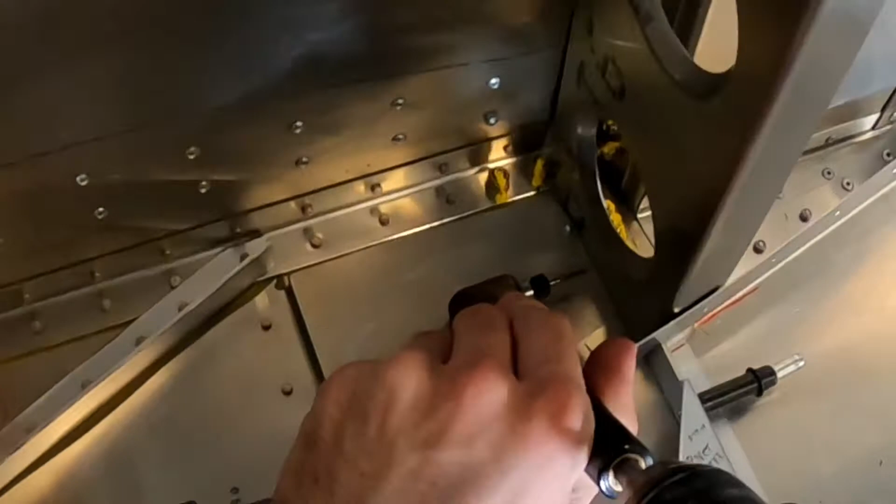Part number 3, I think is what it says. Anyway, all right, and let's match drill one of these guys. Let's start where it's easiest, towards the top.

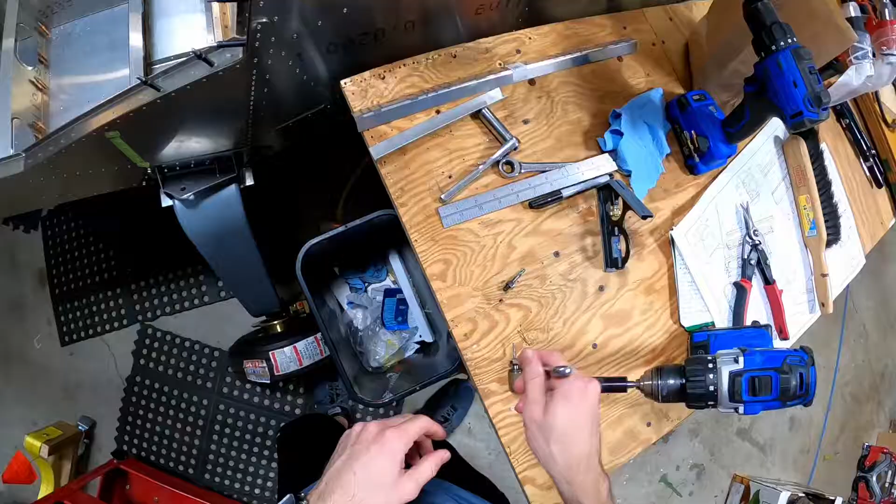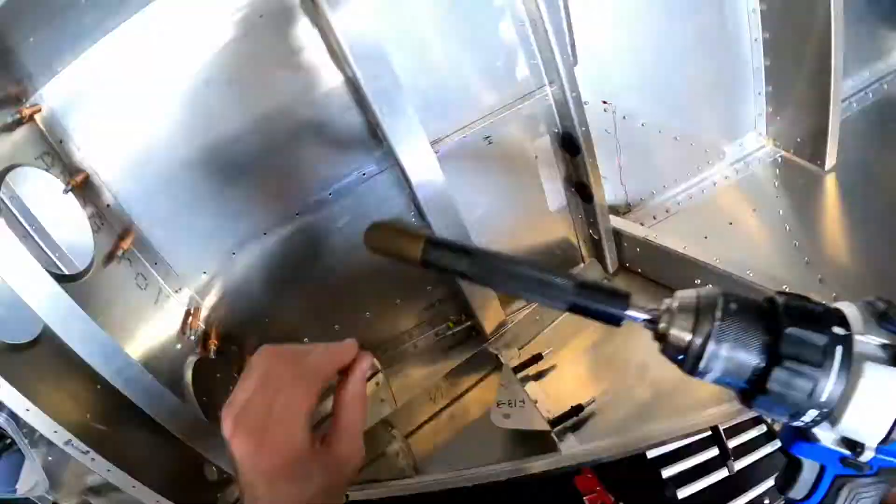All right, that's pretty good. Probably we might have to match drill those up a little bit again to get everything to fit together nicely.